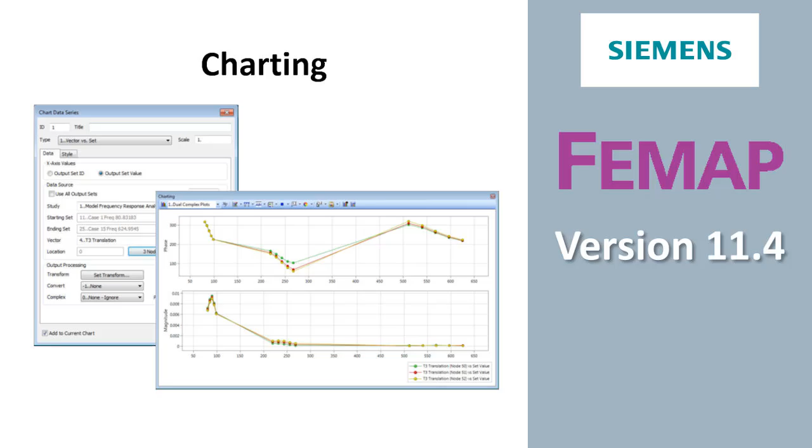Welcome to Femap version 11.4. In this video we'll be looking at some of the new charting enhancements.

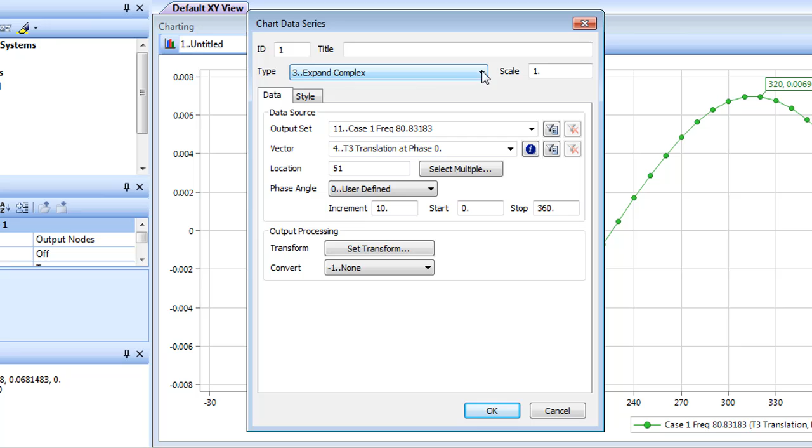In Femap's charting capability, the charting user interface has been updated. Specifically, the chart data series dialog has been streamlined to show only the most relevant information. You can use the type drop-down to specify the type of data series to define, and this will determine the options on the Data tab. The Style tab, however, remains consistent for all data series types. With this update, clutter is reduced and chart definition options are easier to find and set up.

Femap allows you to perform real-time output processing, and we'll see how you can use the charting capability to process data on the fly, eliminating the need for any manual data processing.

In this test model, we have von Mises elemental stresses in the results, and we'll convert those data to nodal output for the line of nodes along the top edge of the model and plot the results in a chart.

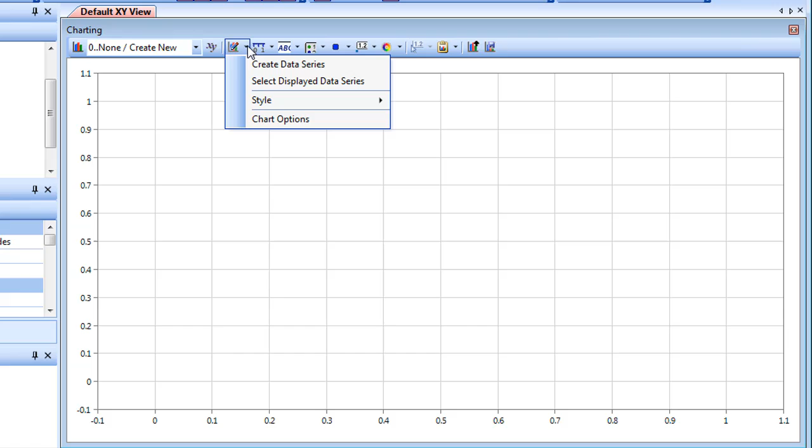So let's activate the charting pane and create a new data series. In the Chart Data Series dialog, we'll select the x-axis values in the global coordinate system and pick up the von Mises elemental stress vector, set processing to average, and select the top edge nodes group for output display.

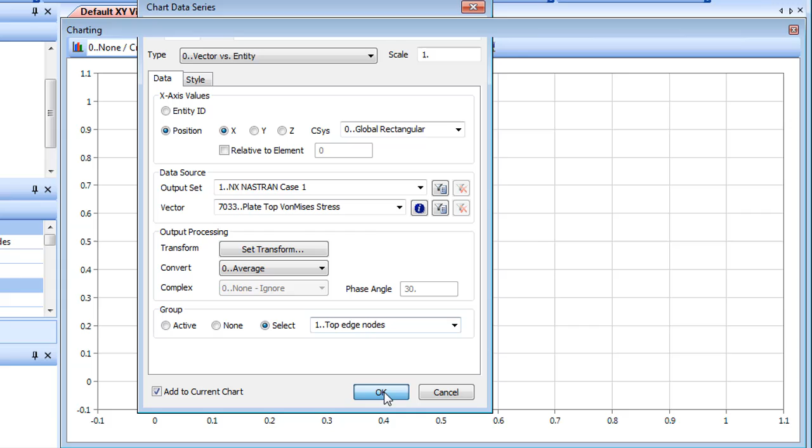The resulting chart shows nodal data along those top edge nodes converted from the elemental results, showing how easy it is to convert output data on the fly in Femap.

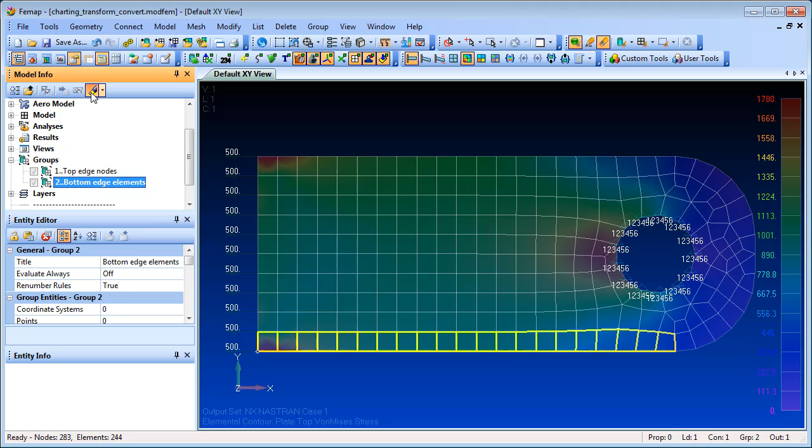Similarly, Femap can perform data transformations on the fly, and we'll see an example of this using the same test model. This time we'll transform plate X membrane forces from a line of elements along the bottom of the model to the global coordinate system and plot them on a chart.

As before, we'll activate the charting capability and create a new data series. Selecting the x-axis values, picking up the plate X membrane force output vector, this time we'll set a transform and elect to transform to the global coordinate system and pick up on the element group along the bottom edge of the model.

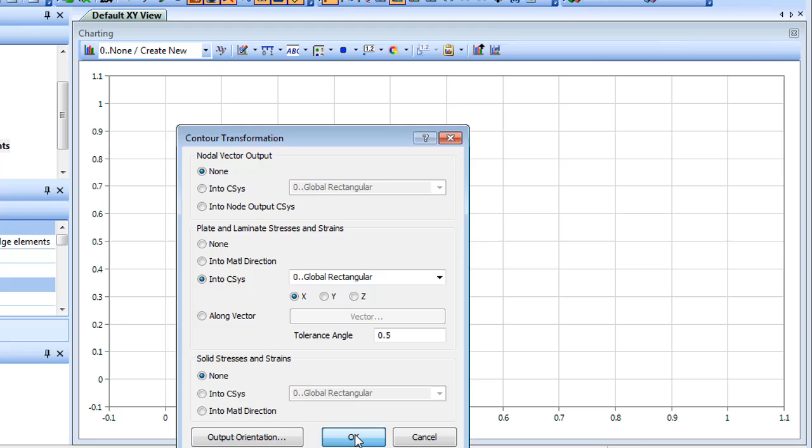The resulting chart shows X membrane element forces converted to the global coordinate system.

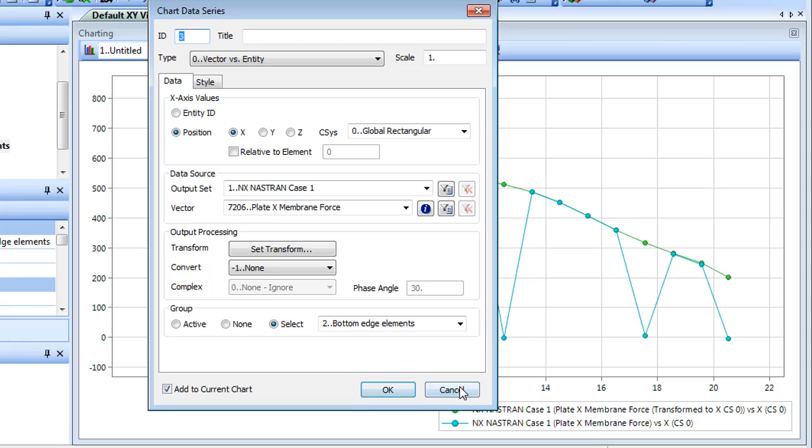Now, just for comparison, we can also go back and create another data series and select similar input, but this time without any transform, and we'll see the element data in its original form with the output relative to the element coordinate system, which is dependent upon the order of element connectivity with the nodes.

Dual complex data plots are available in Femap, so a secondary plot of phase angle can be shown alongside a plot of magnitude. Femap automatically retrieves complex data based on the selected vectors.

To see how to set up a dual plot, we'll use a simple test model that has already run a modal frequency response analysis. So let's activate charting and define a new data series of type vector versus set, opting for the output set value for the x-axis values.

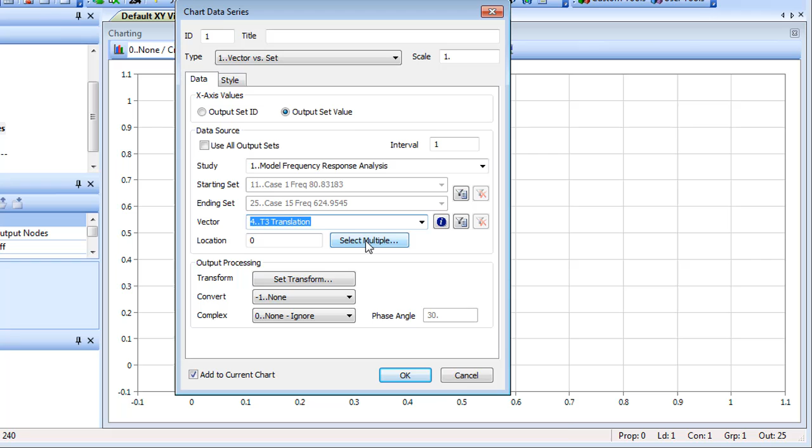We'll just use the single output set for the modal frequency response analysis that's already completed, and the T3 translation of the three output nodes which are located on the right edge of the model. Femap then generates the magnitude plot of the selected output.

Selecting chart options will allow us to set up a double plot with phase at the top and magnitude at the bottom.

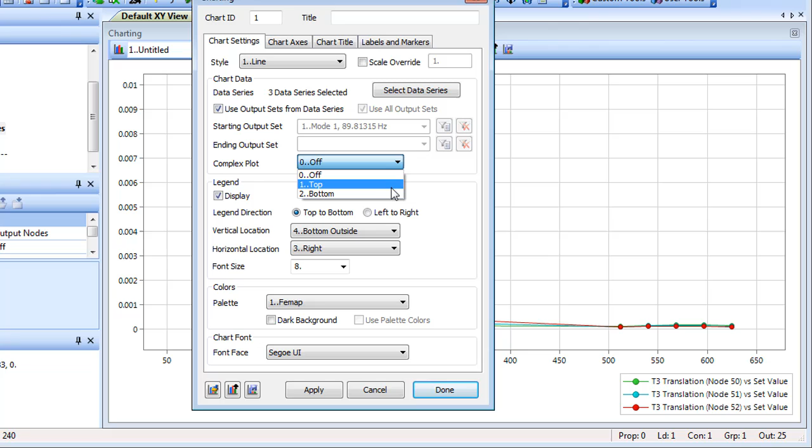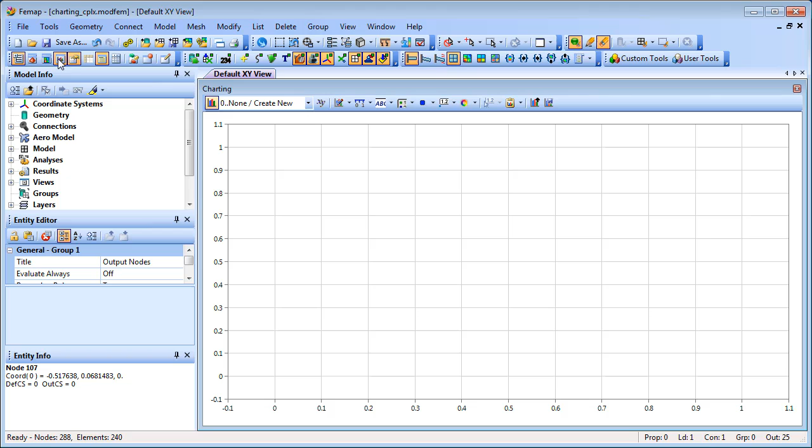Femap can expand magnitude phase data according to a user-defined interval via the complex expansion data series type. Let's see how to set this up using the same frequency response analysis test model.

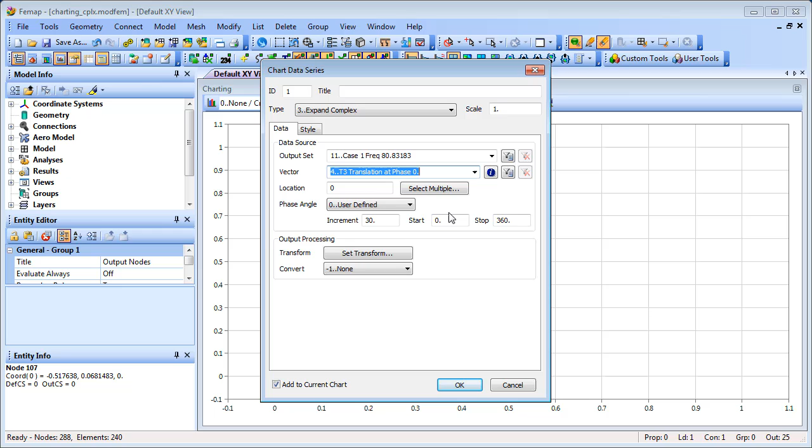We activate charting and select a new data series. This time we'll select type 3, expand complex. For the data, we'll select the first case and the T3 translation. The output target is node 51. And we'll specify a 30-degree phase angle increment for the plot.

The resulting chart shows an expanded plot for the selected vector at all phase intervals. This makes it much easier to identify the max-min peaks for the selected output.